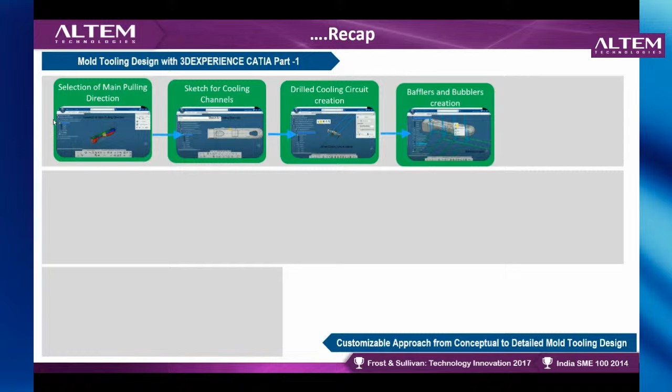Once the main pulling direction is selected, we did the sketching for the cooling channels. Then we did the drilled cooling circuit creation. Once the cooling circuit creation was done, we created baffles and bubblers for the coolant channels. Once that was done, we created the ejectors so that the part can come out once the mold is prepared. So we need to create the ejectors, and that ejector creation was demonstrated.

Then we gave the injection point. As you can notice, in part 1 we are just setting the context. We are creating all the parameters. We are creating the ejectors, we are creating the injection points, we are creating the baffles and bubblers. Once the injection point is created, there are options to create the runner part as well. So all that was displayed in part 1.

Then once the runner part is created, we can assign the faces to core and cavity. There is a one-click command where the model gets distributed into core and cavity, but that is system generated. But if you want to fine tune and additionally move the faces between core and cavity, that option is also available. Manually we can assign certain faces of the part to core and cavity. That is what is demonstrated in part 1.

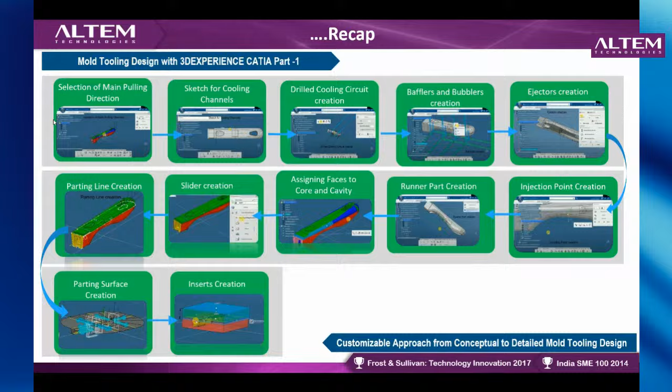Hello everybody. Today I am going to demonstrate the second part of the mold tooling design. In the first part, we have seen the detailed core and cavity design for a panhandle. I am going to continue from where I ended in part 1, when we created the empty insert unit.

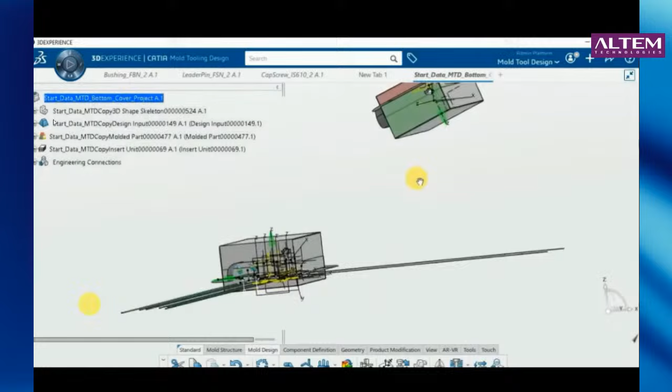Now here I am hiding the design input data. Now that the insert unit is created, we need to activate mold project unit and click on the update button.

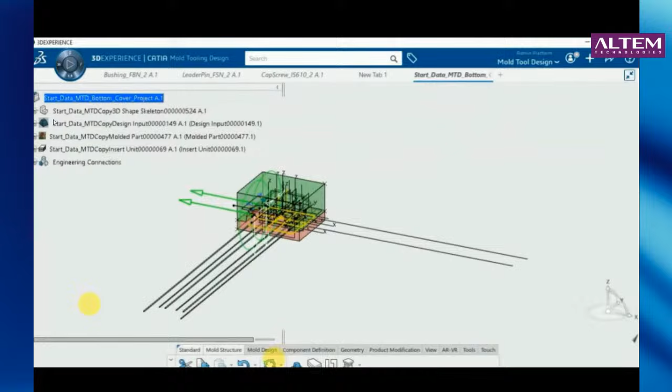Once it is updated, we need to create multiple layout by clicking on the multiple print layout in the mold structure section. We will select rectangular pattern, x is equal to 2 and y is equal to 1. Select the left print and rotate 180 degrees.

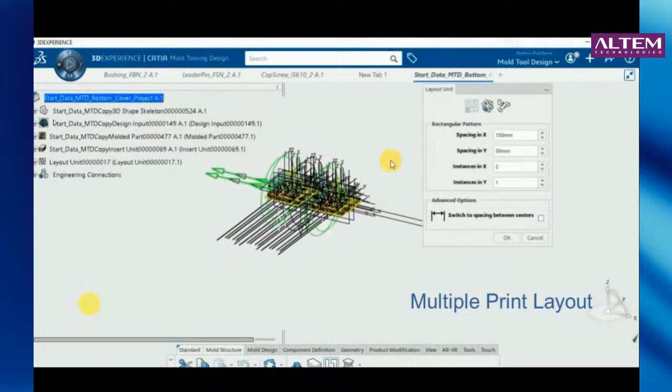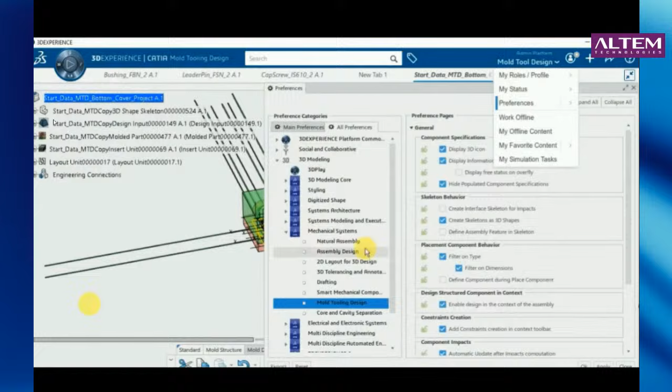Next, we need to create a mold base, and before selecting the mold base, preference setting needs to be changed. Once the preference is changed, we need to activate mold project and select the mold base configurator command.

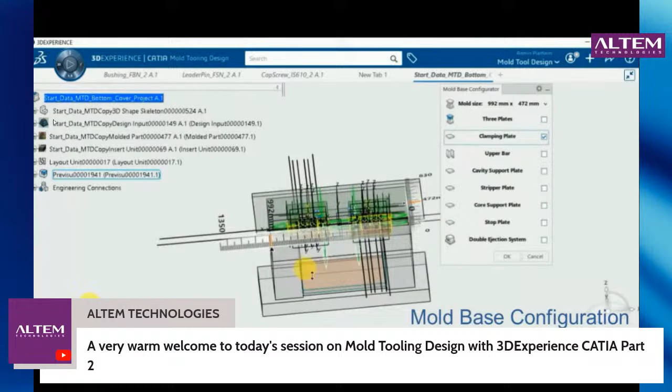Here we can edit the mold base as per the requirement as shown above. We can edit each and every part of the mold.

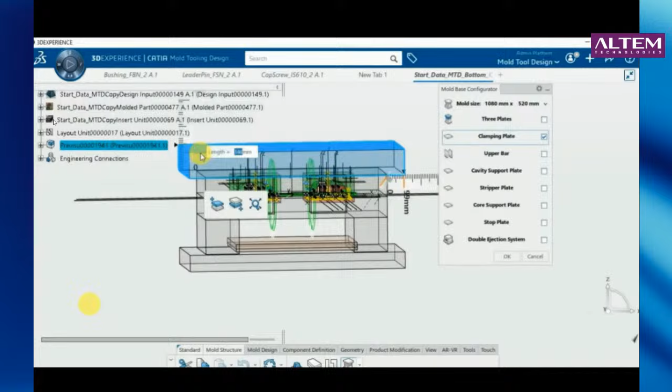Next, we need to create impact of core and cavity inserts on the core and cavity plates. This will help us to detect clashes with components in design context and creates an impact.

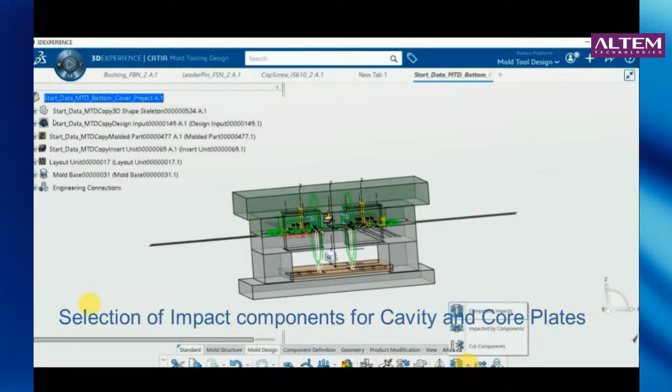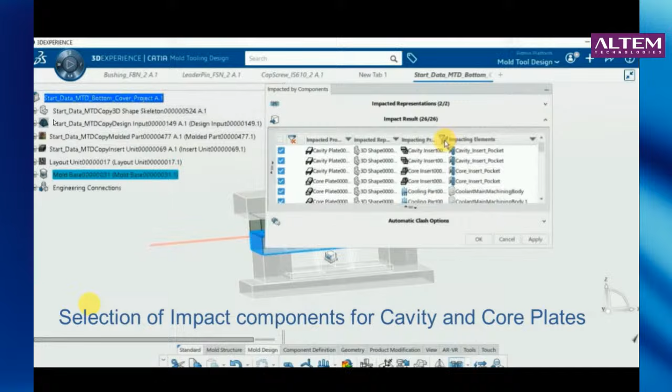We will go to the mold design and select the component impacted by components icon. Here we can select which of the portions that can have an impact on core and cavity plates. I am removing the coolant and the runner in this case.

Now we will open the core and cavity plates in a separate tab to check what is the impact on those parts. This is the cavity plate.

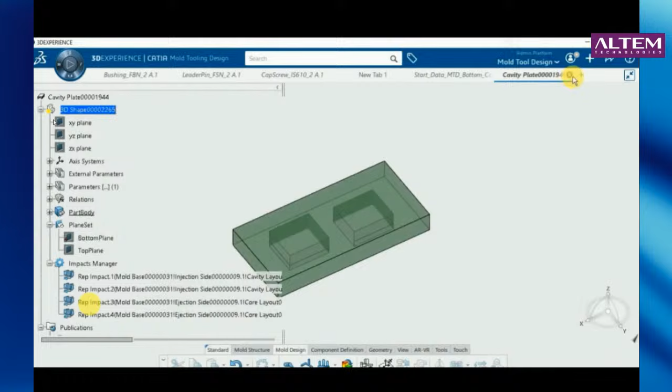Next I am going to open the core plate to check the impacts on the core plate.

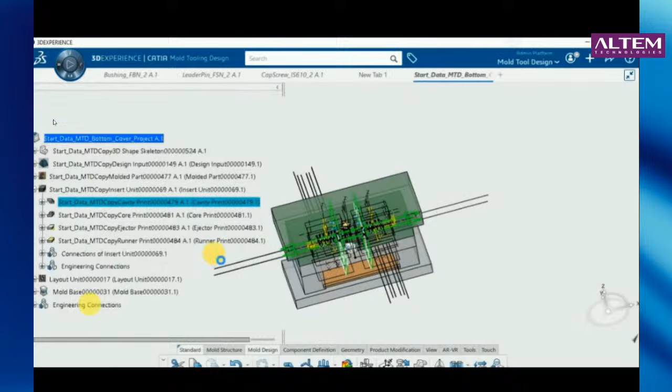One of the most important features in 3DExperience mold tooling software is that we are able to create conformal cooling channel very easily, which has an effect on the output of the molded part when compared to the standard straight cooling channel. The cycle time of the entire process is also reduced by adopting conformal cooling channels.

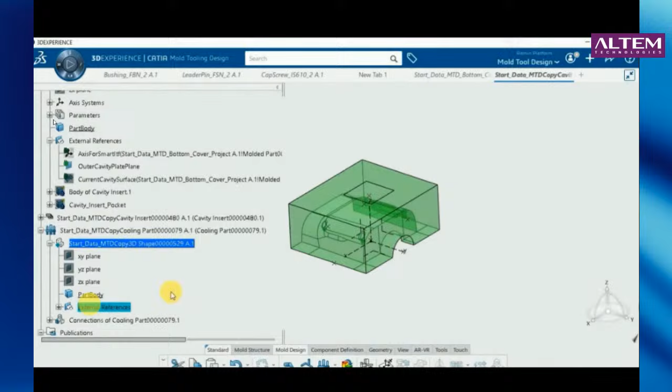For creation of the conformal cooling channel, we need to extract the proper surfaces and project the cooling circuit which will be created as shown. Once projected, we can set the diameter as per the requirement.

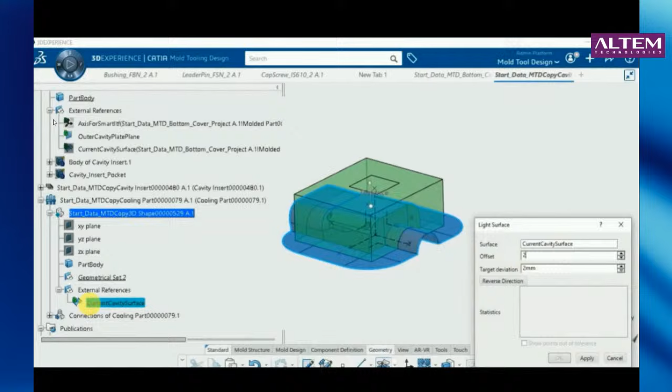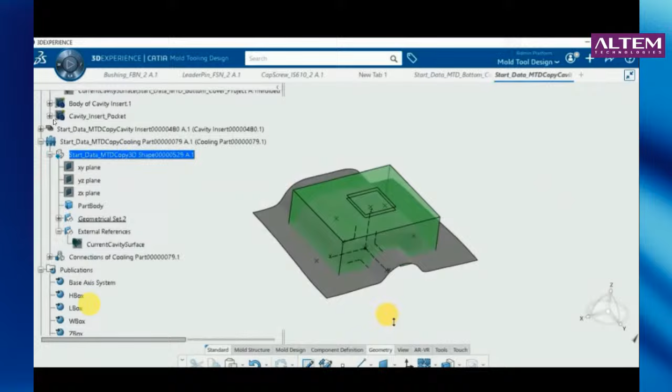Here I am creating a plane on which we will be creating the cooling channel. Now we can sketch the cooling channel as per our requirement as shown.

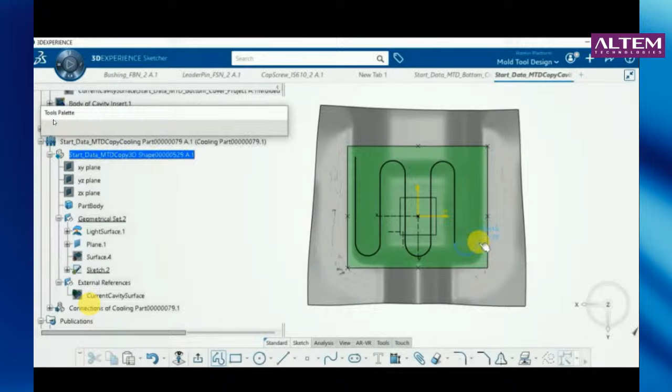Now once the cooling channel is created, I will project the cooling channel onto the surface of the mold.

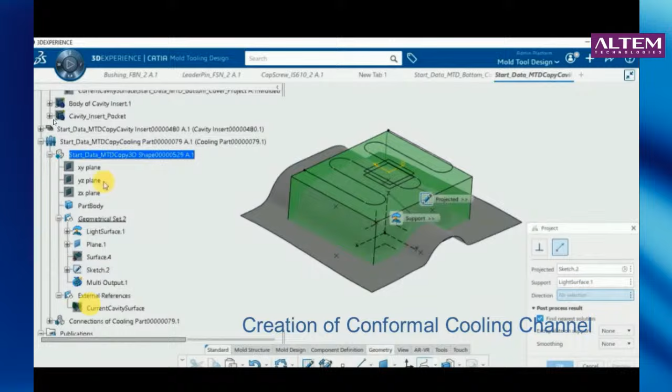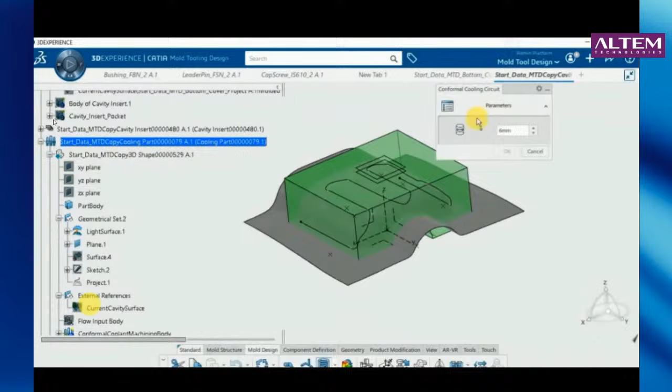Now you can see a conformal cooling channel has been created. Now we can set the diameter as per our requirement. In this case, I am selecting diameter as 6 mm.

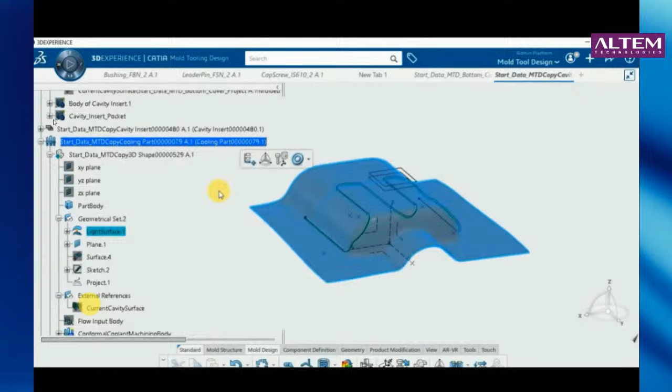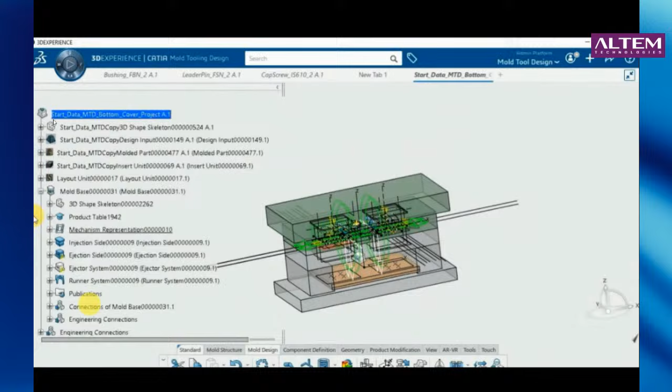Now the next step is to create various mold tooling elements. First, let us create the bushes, for which we need to create a geometrical set under core plate and sketch the points on the exact position where bushing should be placed.

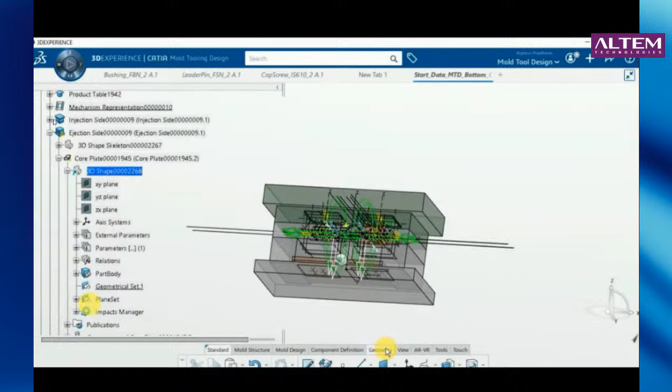I am creating a geometrical set under core plate, creating sketch and sketching the points for the position of the bushes.

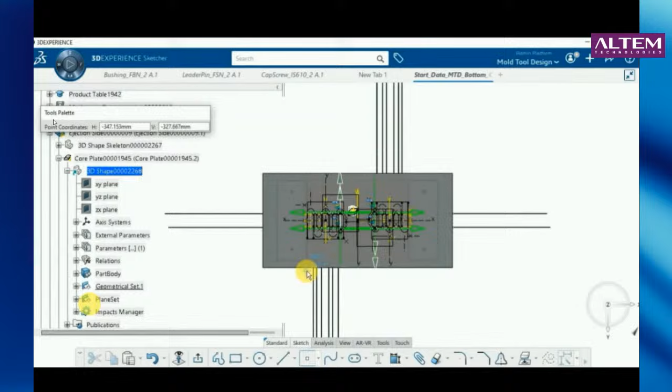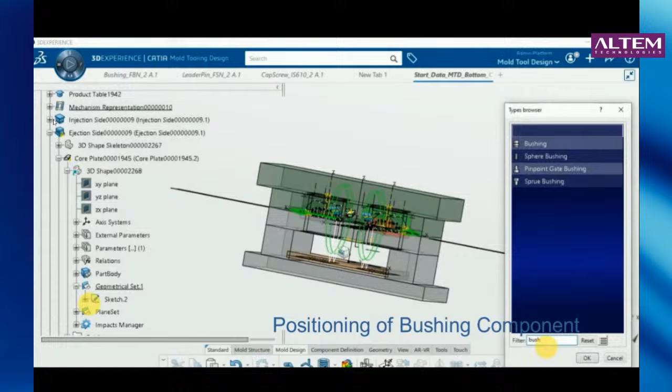Once the points are sketched, we go to the define component specifications under mold design tab and select the bushing type, select the specification as select pattern, and select the sketch where we had created the points.

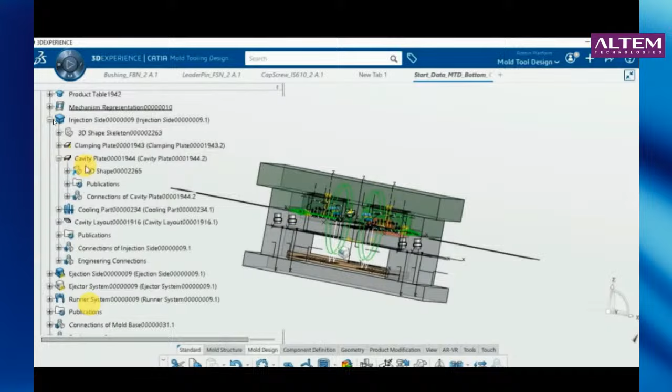In the similar way, we create sketch under cavity plate and create 4 points for the leader pin and select the leader pin in the define component specifications.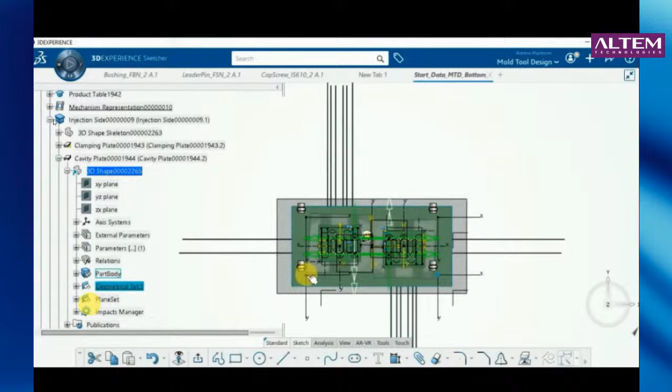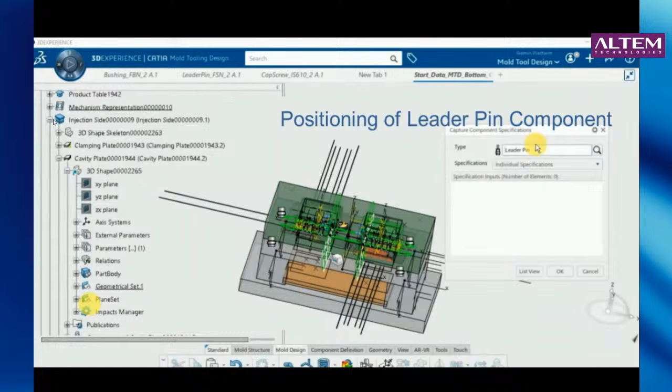Now I will go to the define component specifications and here I will search for leader pins. In the specifications, I will go for selection pattern and select the sketch.

For the cap screws, we need to create points in the sketch under setting plate in the mold and select cap screw type in the define component specifications.

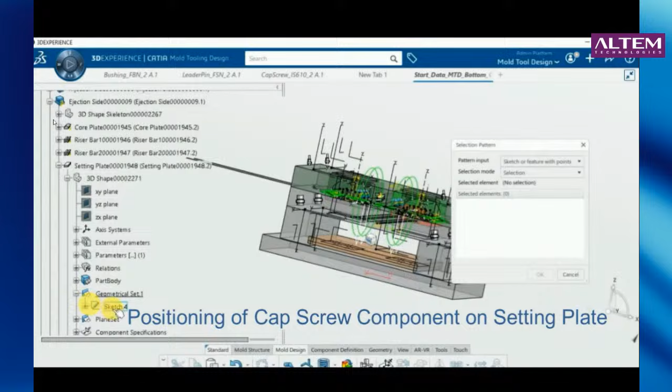Here I will search for cap screw and select selection pattern and select the sketch. We need to create cap screws even in the cavity plate of the mold.

So I'm going to create a new sketch and create points for the position of the cap screw.

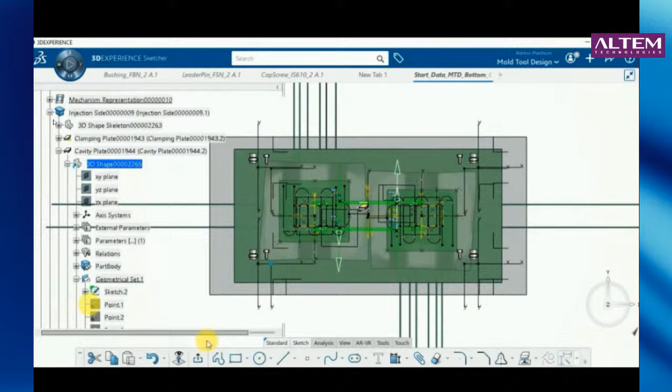Once the specifications are set, we need to replace them with the desired size and make of the actual components from the browser library of the mold tool components.

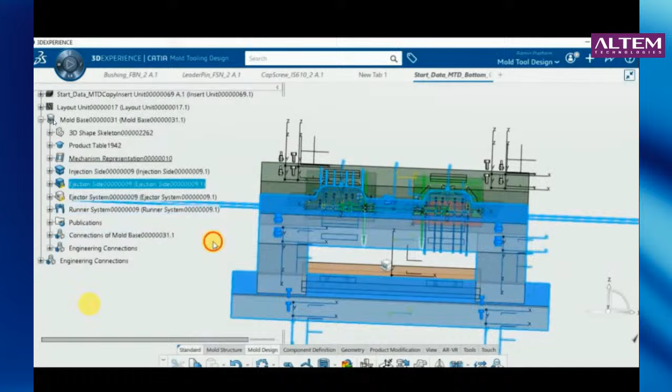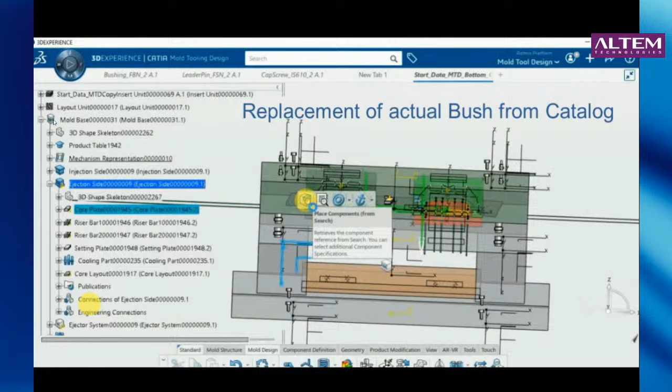First I will go for the bushing, place components from search, and select the bushing.

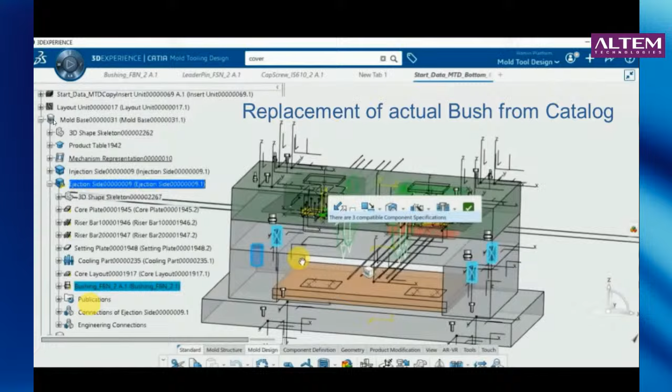I am going to reverse their position. There are options available. Now the bushing is replaced.

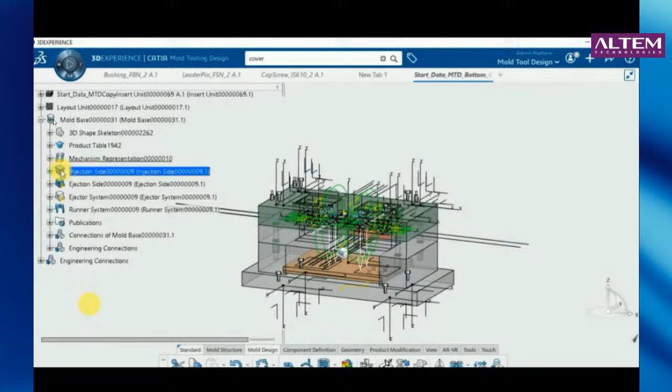In the similar manner, we can replace the actual components of the leader pins also.

As with the previous case, there are options to change the orientation.

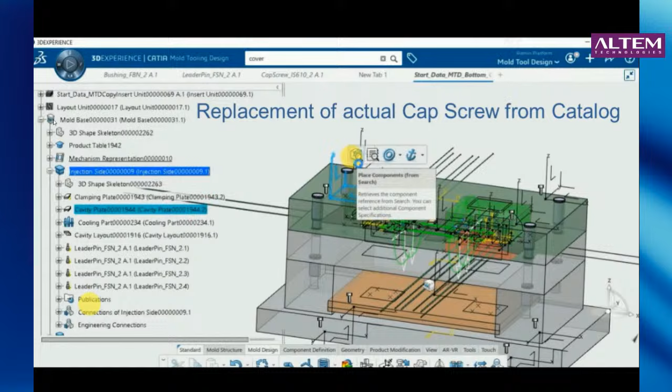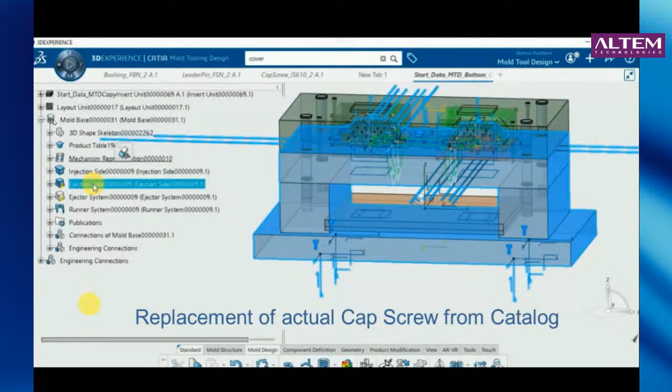Now we need to replace the cap screws also. Here I am reversing the orientation.

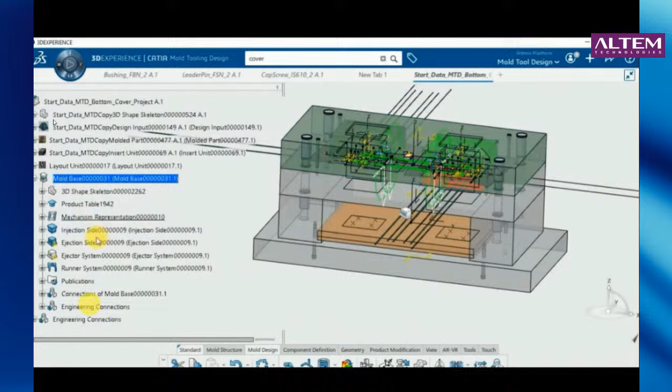We can move the components by using the move components icon. Once we move and update, the impact features in the mold base also gets updated. Also, the components will move with respect to the anchor points either away from each other or towards each other.

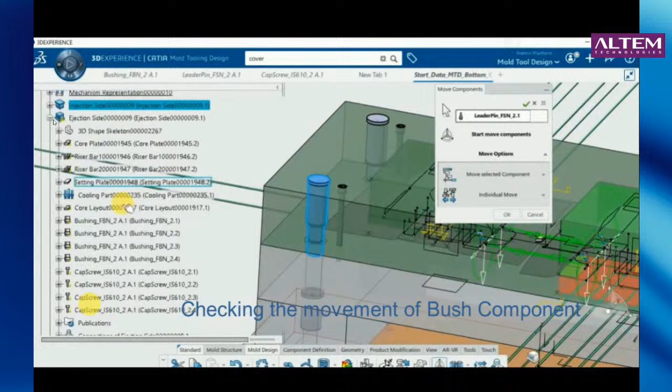Here I am moving the bushes and the leader pin. I will go for the individual move option here. As you can see, both the bush and the leader pin are moving in the same direction.

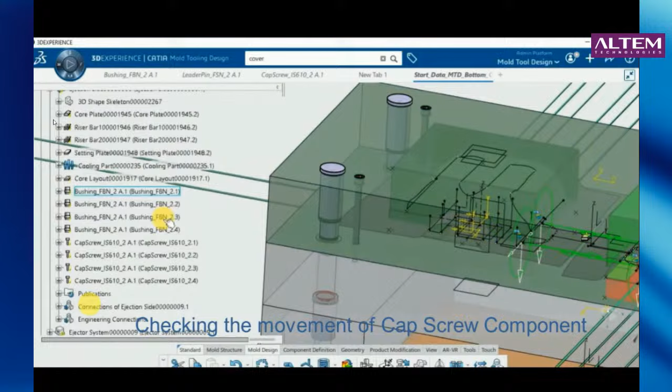Now I am going to check the movement of the cap screws, to see how they are moving with respect to each other.

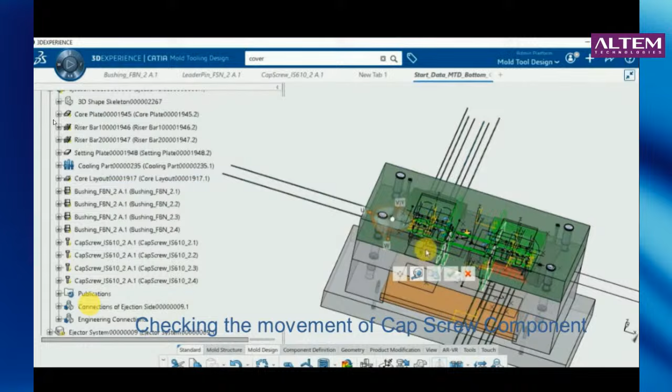In this case, the two cap screws are moving away from each other.

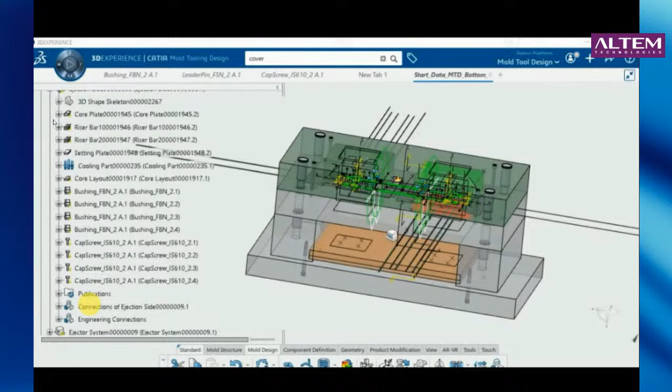Next, we will see how various cooling circuit components are created. We will open the core print in the separate tab along with the cooling channels.

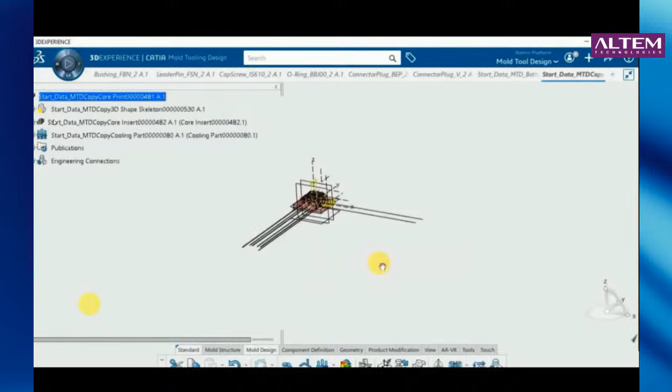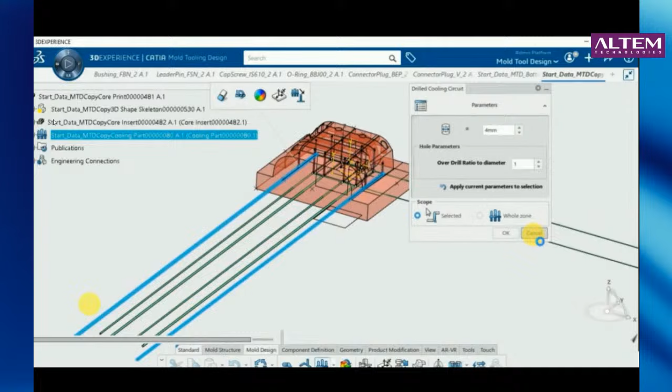We go to the drilled cooling circuit tab and set the parameters as shown. Then we select the two cooling channels and define the component specification and select the O-ring for the particular two cooling channels.

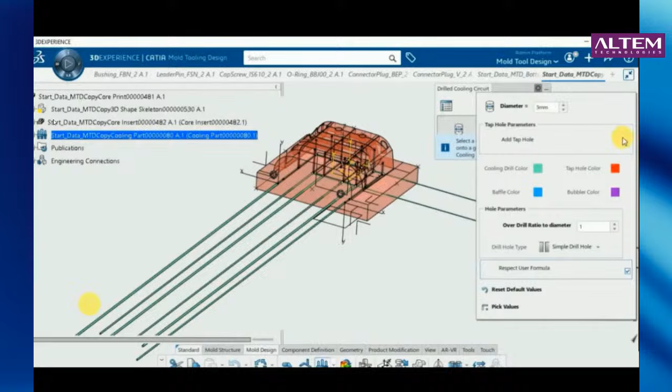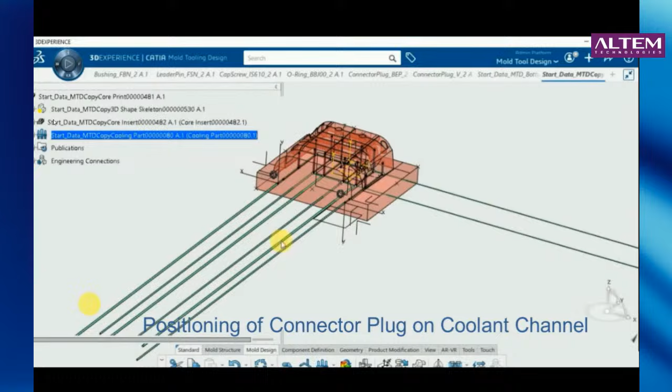We need to change the parameters for different components. Now I am setting the components for the connector plug component. We will select the cooling channels and define the component specifications and create the cooling connector plug as the specifications.

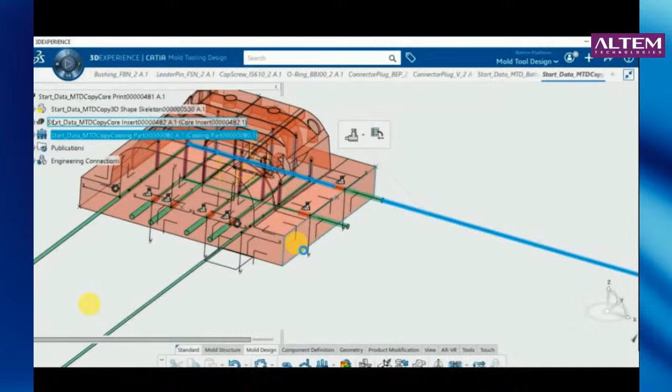I am changing the drill hole parameters for a different type of connector. Different type of connector plug.

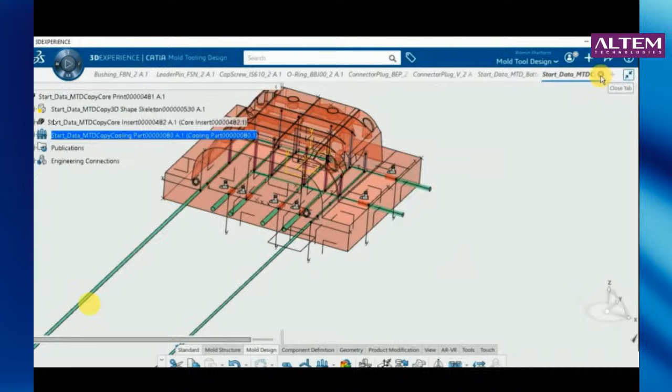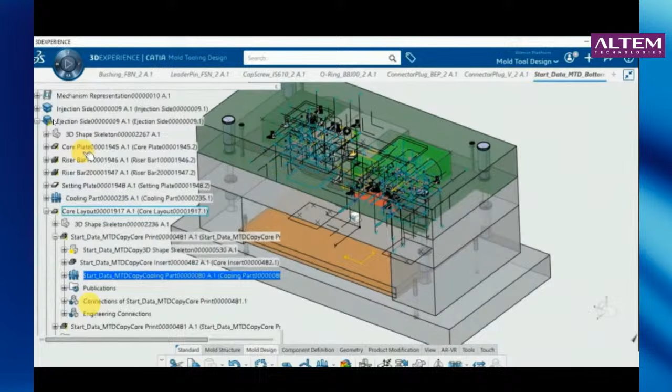I am selecting the required cooling channels and selecting the connector plug.

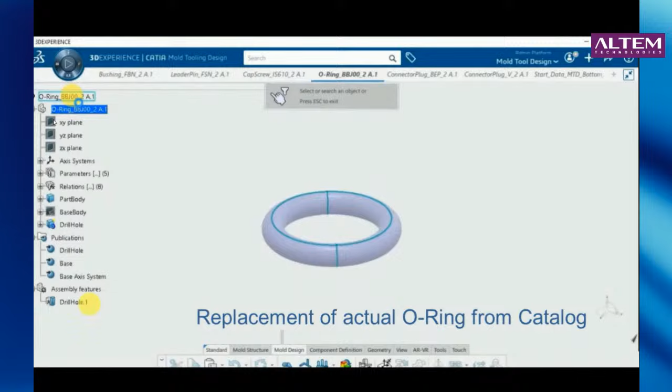Once the specifications are defined, we replace with the required size and make of the cooling mold components from the catalog library of the mold tool cooling components. Here I am replacing the O-ring.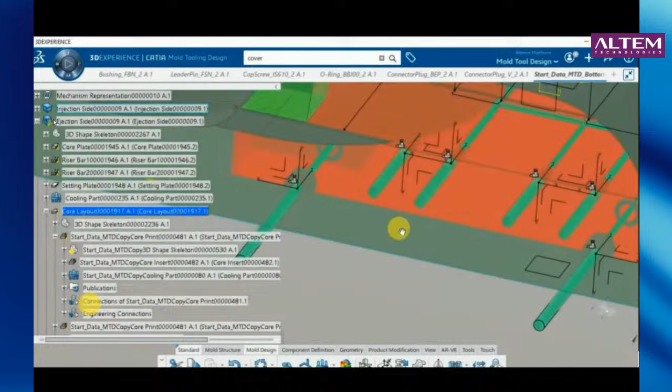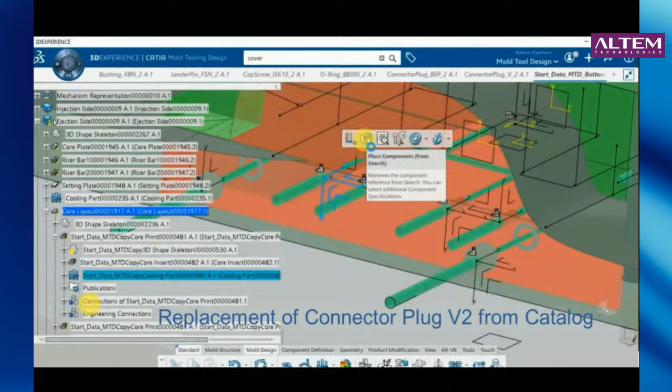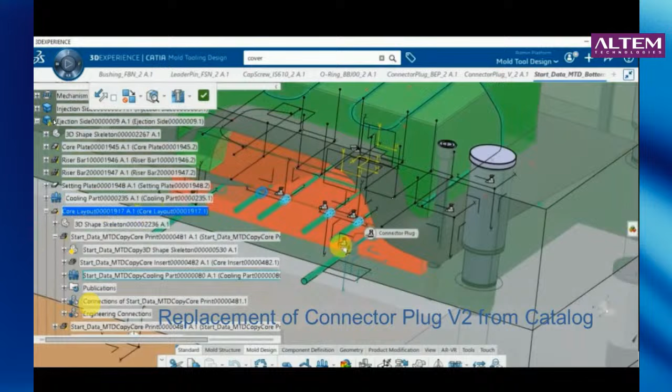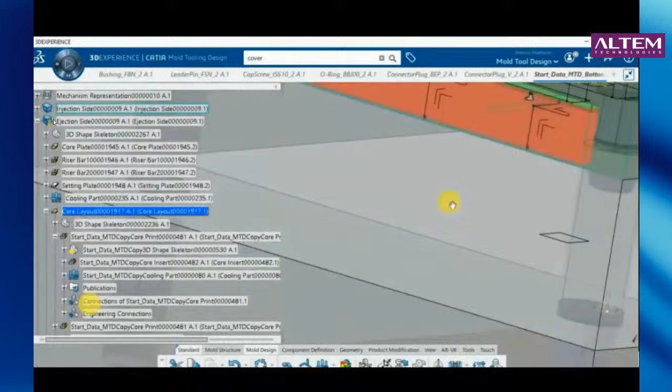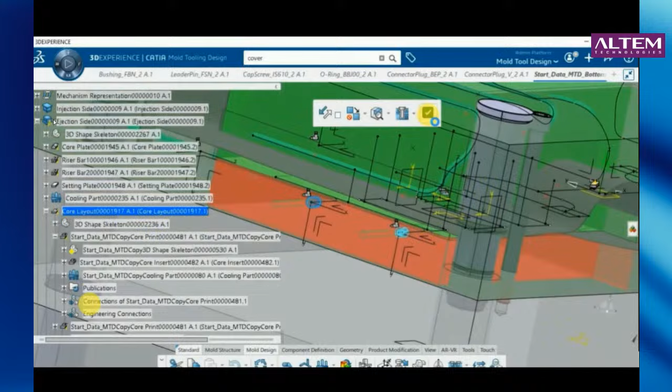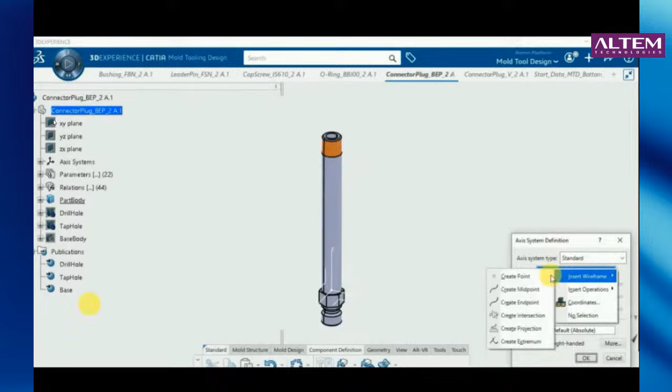In 3DEXPERIENCE, we have options to edit the individual mold components to our required size and specifications. Here I am creating a point in the axis system on the part so that it can sit at the proper position when I am inserting it into the mold base.

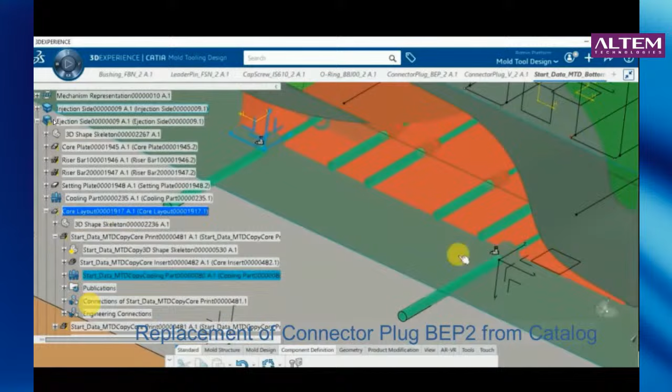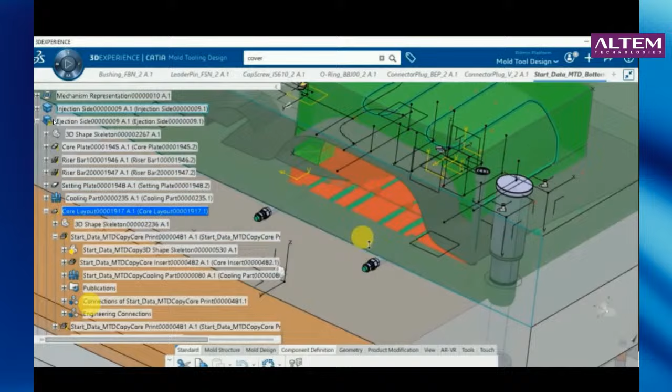Now I will replace these two connector plugs with the required connector plug. As you can see, all the connectors have been positioned.

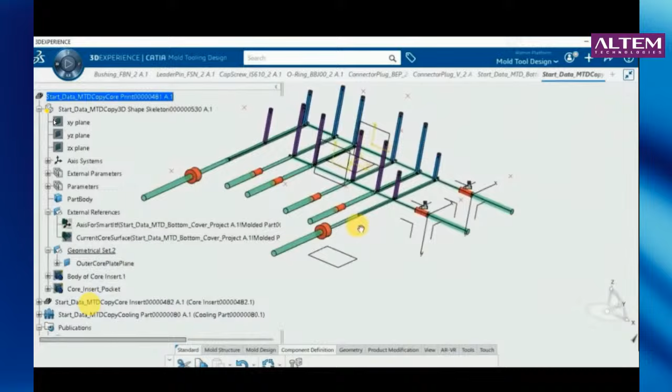In the similar manner, there are options available to create and position all of the mold tool components in the 3D experience. Thank you.

So now part two of the webinar is complete. With this, the end-to-end process of the entire mold tooling design with 3D experience has been demonstrated.